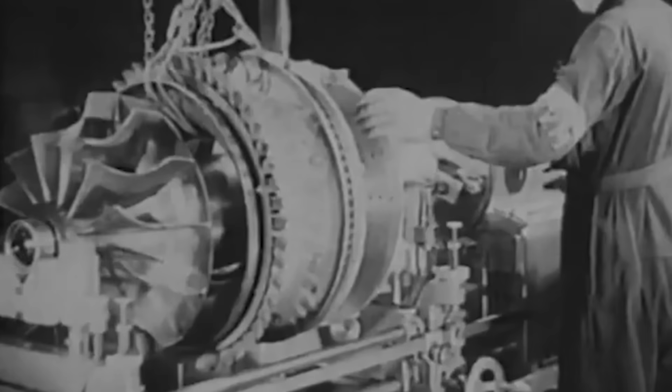Without even touching on the advances in avionics, weapons, and infrastructure that had to evolve just to keep pace, the arrival of the jet engine collapsed and eclipsed decades of incremental progress into a single breathtaking leap. In barely 10 years, jets pushed speeds, altitudes, and climb rates so far beyond piston-era limits that everything had to change. Runways stretched into miles of concrete. Gun sights had to be guided by radar, cockpits were sealed and pressurized against the thin air of 50,000 feet, and wings were swept back like arrows to slice through the sound barrier.

To give you another bit of perspective on the insane pace of jet aircraft development, just 25 years separate the maiden flights of the world's first jet-powered aircraft and the world's fastest jet-powered aircraft, the SR-71 Blackbird.

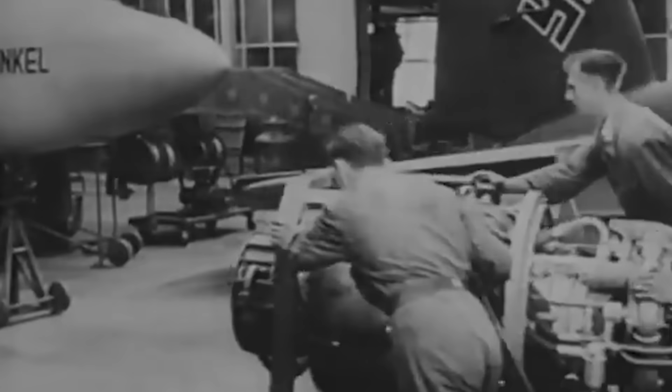Now, of course, in reality, this is a gross oversimplification. The dawning of the jet age was the product of decades of theoretical work conducted by many gifted individuals, often resulting in parallel breakthroughs. It's a deeply complex topic with many conflicting stories, depending on what sources you read, and one that deserves exploring in real depth.

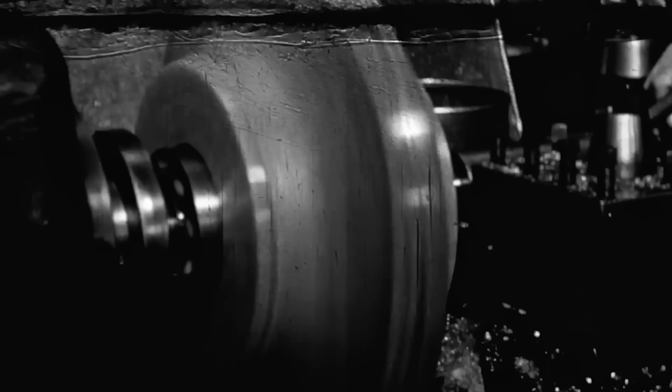But for the purpose of this video, I am going to condense this into a few short paragraphs so that I can actually focus on the aircraft itself and its engine. Another, much longer video on jet engine development in general will come later, heaven help me. So, let's set the scene a little bit.

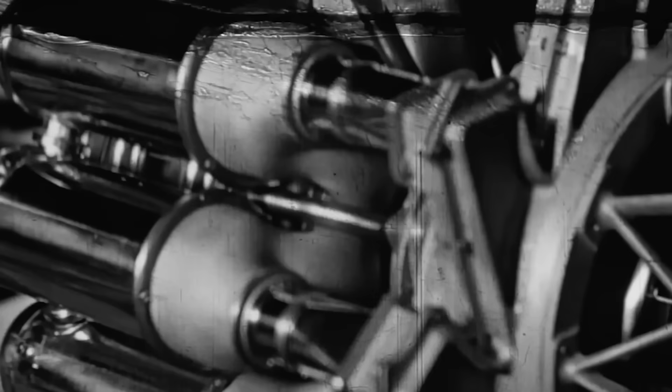By the 1920s and 1930s, aviation had advanced at a staggering pace. The all-metal monoplane had replaced the fragile biplane, retractable landing gears and streamlined cabins were becoming standard, and piston engines were more powerful than ever. Aircraft like the Supermarine Spitfire and the Messerschmitt Bf-109 could now exceed 350 miles per hour, speeds that, only a decade earlier, would have been considered the realm of daredevils or liars.

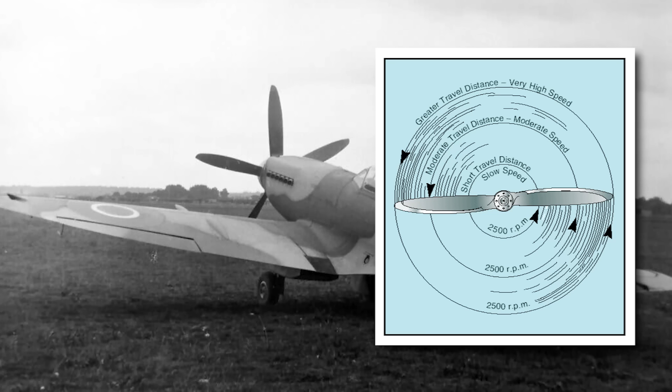But as these speeds increased, engineers began to encounter a fundamental barrier. And that was propeller tip speed. You see, the outer ends of a propeller blade travel much faster than at the center near the hub, and as airspeed and rotational speed increase, the tips approach the speed of sound. Near this threshold, shockwaves form, causing sharp drops in efficiency, severe vibration, and mechanical stresses. Now, this wasn't an absolute engineering brick wall, but beyond this point, squeezing out more speed became an exercise in diminishing returns, and side effects.

One of those side effects was noise. A lot of noise. Supersonic propeller tips would essentially generate a constant series of small sonic booms, hundreds of times per second. Later on, this would be demonstrated, enthusiastically demonstrated, by the Republic XF-84H Thunderscreech in the 1950s. Perhaps the most accurately named aircraft in existence, it tried to operate with propeller tips that rotated at Mach 1.18, or 1,446 kilometers per hour.

It became infamous for being so loud that it could be heard from dozens of miles away. Ground crews reported nausea, headaches, seizures, and a strong desire to be somewhere else, and test pilots refused to fly it. Now, that is of course an interesting and somewhat entertaining topic that we will come to in another video. But, back to the 30s.

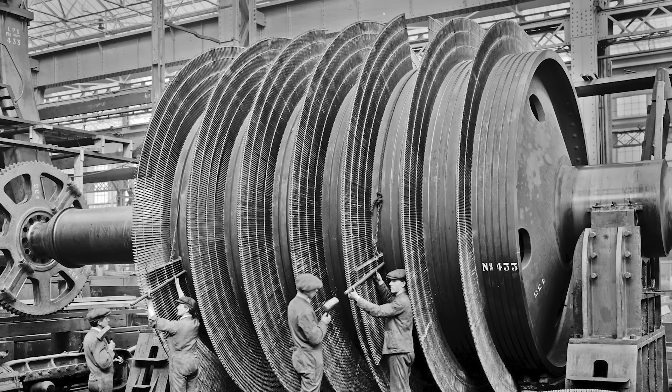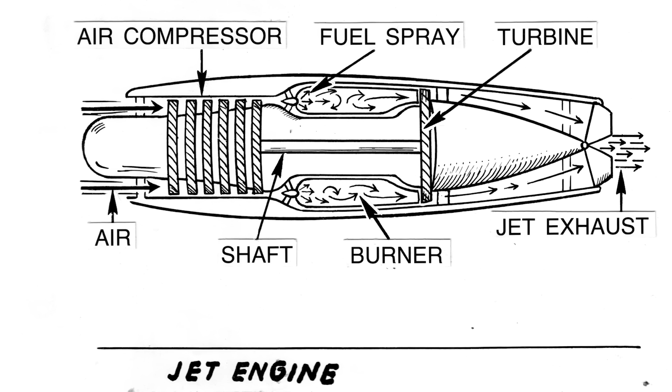This physical limit, combined with the impracticality of brute forcing around it, made alternative propulsion methods attractive to forward-thinking engineers. Now, the gas turbine, long studied in stationary applications, offered a possible solution. The principle of a gas turbine engine is simple in theory. Air is drawn in, compressed, mixed with fuel, combusted, and expelled at high velocity to produce thrust.

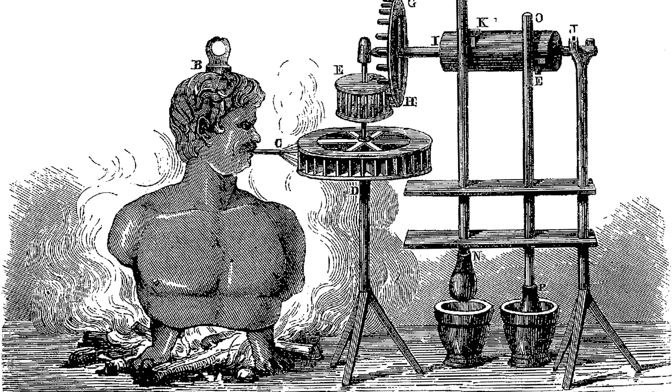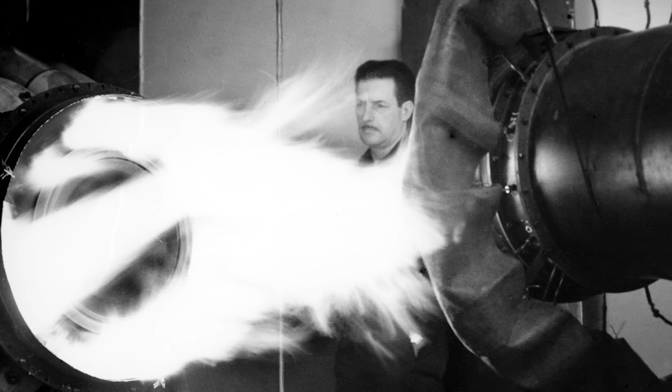It was not a new theory, and it had existed on paper in one crude form or another for years. But in practice, building a lightweight, reliable turbine engine capable of continuous high-power operation was a monumental challenge. The obstacles were many, and they were inconveniently interconnected, as in solving one problem usually required solving three. Metallurgy, for example, was not yet producing alloys that could safely cope with the environment found inside a jet engine. Turbine blades in these early designs faced prolonged exposure to combustion temperatures exceeding 700 degrees Celsius, conditions few engineers had ever needed to consider before.

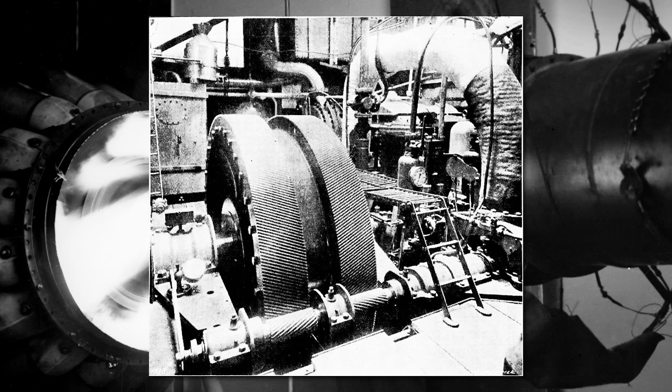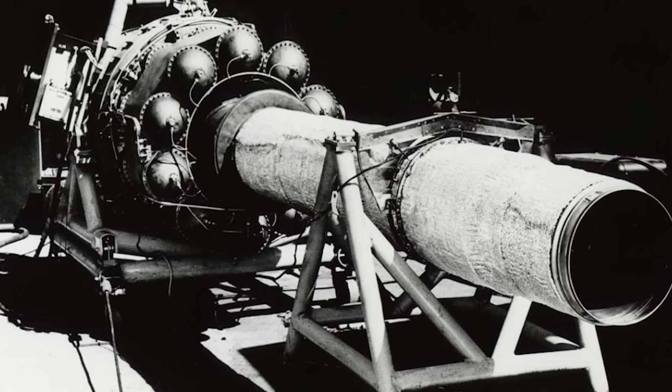The alloys of the time had been developed for piston engines, steam turbines, or other far less punishing applications, and they tended to treat these new temperature ranges as a polite invitation to soften, warp, or fail outright. Precision manufacturing was another challenge to overcome. Compressors and turbines, spinning at tens of thousands of revolutions per minute, didn't take kindly to the sort of imperfections that were still common in the machine shops of the day.

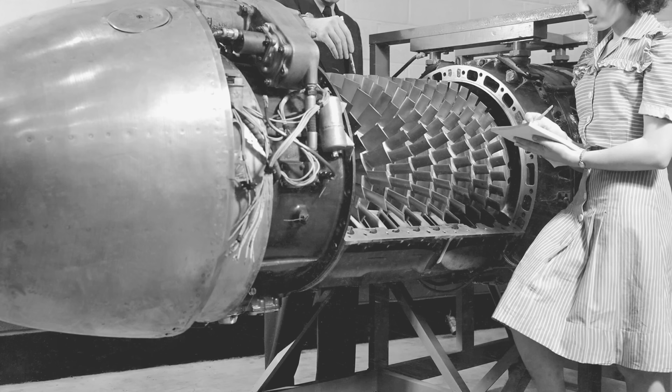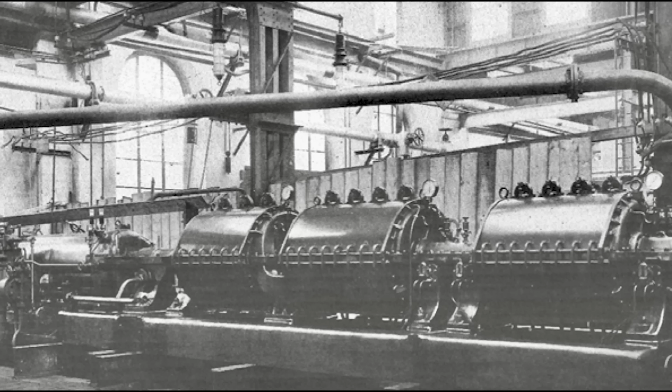Even a minor flaw in a blade could lead to imbalance, vibration, or in the worst cases, a very expensive shrapnel factory. Aerodynamic knowledge of compressor and turbine stages was also incomplete, which meant that early designers spent a lot of time trying to avoid surging or stalling in the compressor. These were professional engineering terms for, "We'd like the engine to stop exploding, please." And since weight and compactness were essential for anything that had to leave the ground, designers couldn't simply shrink a stationary industrial turbine and bolt it to a wing. They had to invent entirely new layouts, bearings, and cooling systems from scratch.

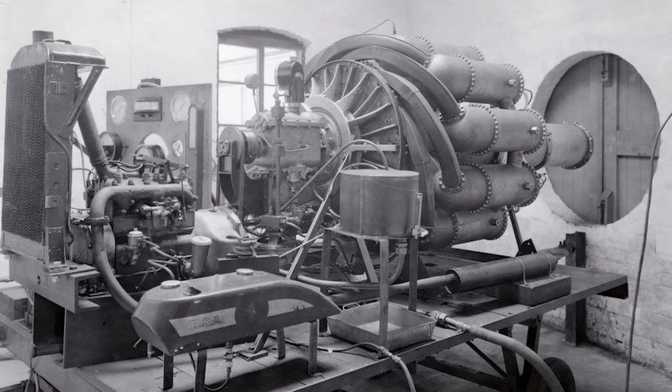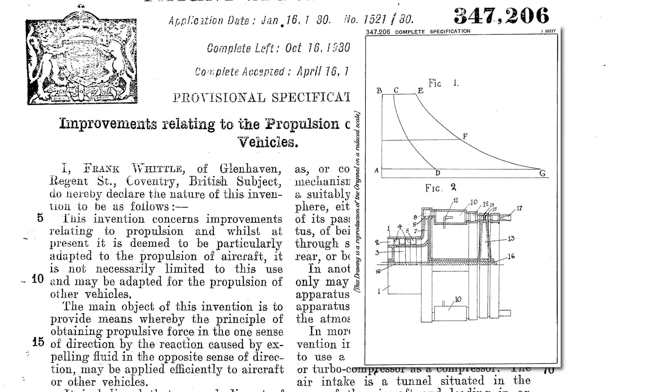So, as I said, the challenge was monumental, but scientists and engineers persevered, and towards the middle of the interwar period, a few individuals were making real progress. Today, we're just going to focus on two, because they are the most relevant to this video's topic. In Britain, Frank Whittle, an RAF officer with a knack for unconventional thinking, began working on a jet propulsion concept in the late 1920s. He opted for a single-stage centrifugal compressor, a design well understood from superchargers, paired with multiple external combustion chambers feeding into a single axial turbine.

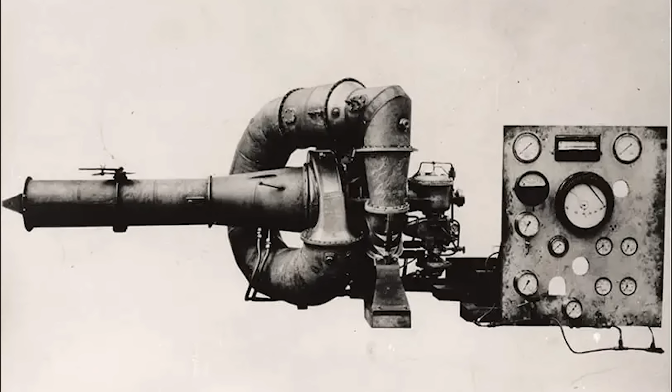This configuration was mechanically sound, compatible with the manufacturing tolerances of the day, and robust enough to survive more than one test run. Unfortunately, Whittle struggled to gain official support, but that didn't stop him. Whittle founded Power Jets Limited in 1936. With minimal funding, he and a small team began bench testing experimental engines. The first prototypes suffered the usual early engine ailments: bearings that wore out, metals that softened, and a general reluctance to run for very long.

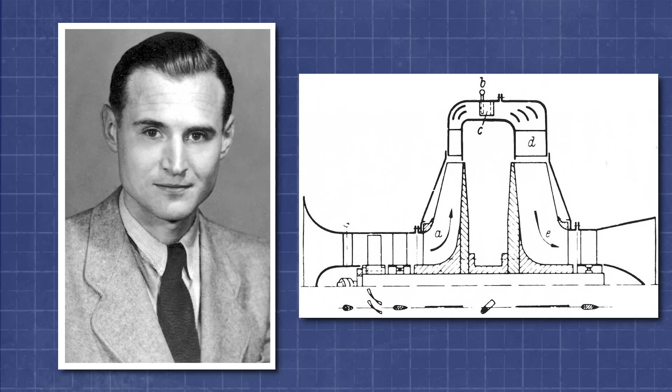But in April of 1937, the WU, also known as the Whittle Unit, finally ran for sustained periods. For a machine entirely dependent on untested ideas and fragile metallurgy, that in itself was a small miracle. Meanwhile, across the Channel and a few hundred miles away in Germany, Hans von Ohain, a physics student at the University of Göttingen, was working independently on his own turbojet concept.

His designs combined an axial inducer stage, a short set of blades at the front that straightened and smoothed the incoming air, with a centrifugal compressor. This hybrid arrangement gave a smoother airflow into the compressor than a pure centrifugal layout, and allowed the engine to be more compact in length than a purely axial design, though at the cost of some ducting complexity.

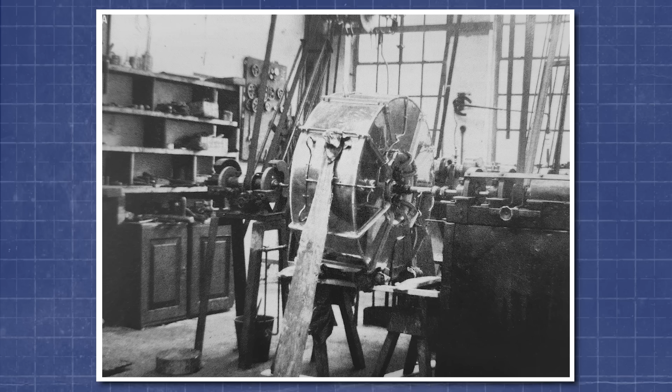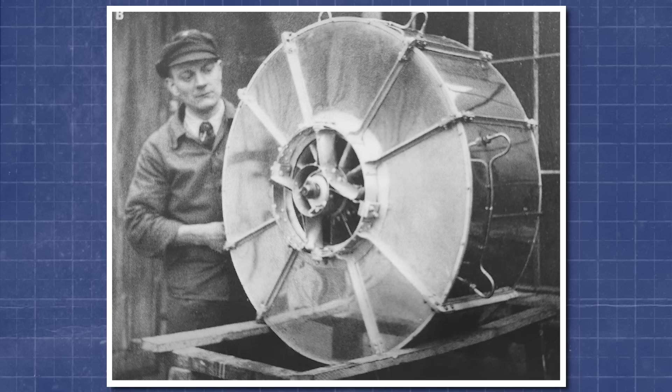Von Ohain's earliest experiments used hydrogen as fuel. This wasn't because he had visions of a future hydrogen economy, but because hydrogen burns cleanly and ignites easily, making it ideal for bench testing. It avoided producing carbon deposits and soot buildup, and it simplified the sealing challenges when working with early alloys and lubricants. In 1934, lacking any sort of industrial backing, he partnered with Max Hahn, a local car mechanic who had the skills and the tools to turn von Ohain's sketches into crude but functional test rigs.

Now, it's important to briefly address something that comes up a lot when discussing early jet engine development. Did von Ohain nick Whittle's ideas? In some circles, it's claimed that von Ohain had read Whittle's 1930 patent for his turbojet and used it as a stepping stone for his own work. The truth is different, and a bit more nuanced.

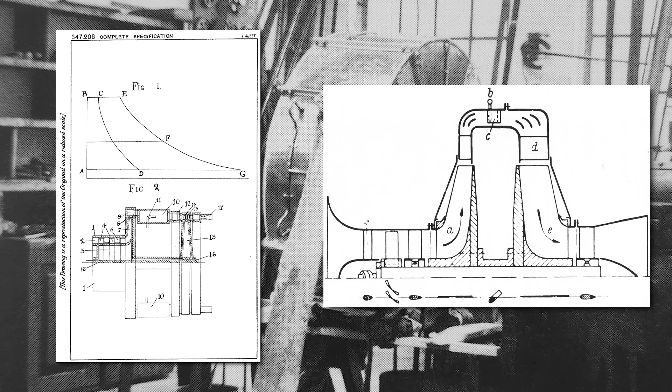Before filing his own patent in 1935, von Ohain's attorney uncovered Whittle's earlier patent. Now, to avoid a potential legal headache, he advised narrowing certain claims so that they wouldn't overlap with Whittle's. Von Ohain later acknowledged that he had reviewed Whittle's patent at that time, but insisted that his own core concepts, including the axial-centrifugal layout, were already in his notebooks before he even became aware of Whittle's work. Whittle, for his part, had initially suspected that von Ohain's design was a derivative of his own, but post-war technical comparisons convinced both men that these were genuinely different engineering solutions to the same problem,

a rare case of true simultaneous invention. Now, getting back to the engine itself, these early experiments caught the attention of von Ohain's professor, Robert Pohl, in 1936. Pohl then introduced him to one Ernst Heinkel, one of Germany's most ambitious aircraft manufacturers, and this is where the story of the Heinkel 178 truly begins.

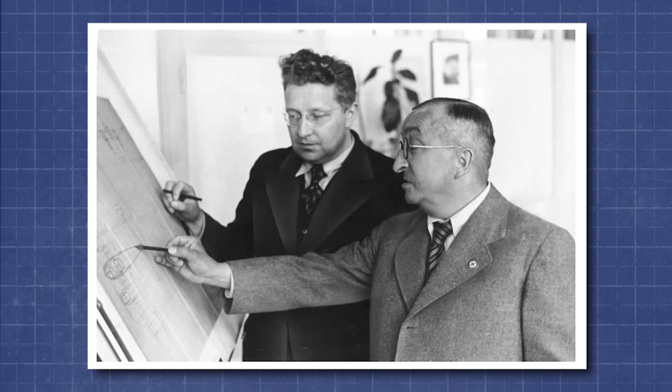By the mid-1930s, Ernst Heinkel had established himself as one of Germany's most prominent aircraft manufacturers. His company, Heinkel Flugzeugwerk, produced a range of military and civilian aircraft, from fast reconnaissance planes to advanced bombers. But Heinkel was not content to simply meet the requirements of the Reichsluftfahrtministerium, or the Reich Air Ministry, or RLM for short. He was a forward-thinking man, always looking for the next leap in aviation technology, and he was not especially patient about waiting for official permission to take it either.

Heinkel had a history of backing unconventional projects, and his newest passion was the exploration of high-speed powered flight. Thus, when Hans von Ohain and Max Hahn presented Heinkel with the concept of a practical turbojet, he recognized the potential immediately. Heinkel agreed to support the project, not under any official Luftwaffe or RLM sanction, but as a private and secret development program. This was not Heinkel's only covert venture. Around the same time, he also authorized the construction of the world's first liquid-fueled rocket aircraft, developed in collaboration with a young rocket engineer named Wernher von Braun.

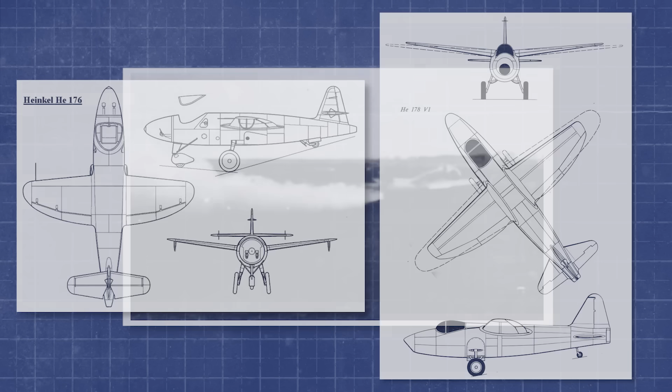The rocket plane would be designated the Heinkel 176, and the turbojet project became the Heinkel 178. Both were experimental machines unlike anything else in existence in Germany, each requiring entirely new engineering approaches, new materials, and new operational procedures. Neither was likely to see service anytime soon as a practical design, but Heinkel wasn't aiming for immediate practicality. He was aiming to prove what was possible, even if it meant operating at the very edge of what his engineers and the technology of the day could handle, and even if it meant doing it behind the back of his own government.

The Heinkel He 178 was designed by Siegfried and Walter Günter, Heinkel's chief designers, along with Heinrich Hertel. Tragically, Walter Günter died in a car accident in 1937, but Siegfried carried on with the work. The Heinkel 178 was an airframe built to test the new jet engine and nothing else. It was not intended to be any sort of production aircraft, and as such, the design team made deliberate compromises in the pursuit of three distinct goals: simplicity, lightness, and engine accommodation. It had straight, tapered wings mounted high on the fuselage, with a small amount of dihedral.

These wooden wings were designed by the Günter brothers and used an airfoil that was 12% thick at the root, tapering to 7% at the tips. Large trailing edge flaps were placed inboard, with the ailerons on the outer sections. The tailplane and elevators were also made of wood.

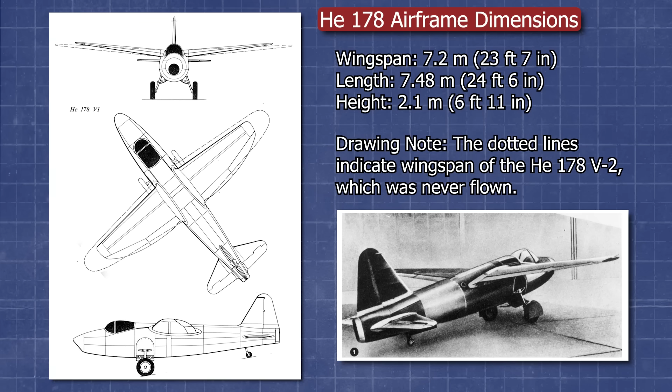No attempt was made to incorporate swept wings, as aerodynamic research in this area was still developing, and it was unnecessary for proof-of-concept flights. The only concession to complexity was the landing gear. Designers initially planned for all three wheels to retract into the fuselage, as speeds of over 800 km an hour were hoped for. But during the first flights, the gear was to be left fixed in place with the retraction openings faired over, and, as it turned out, this would be the only configuration that it was ever operated in.

As a test aircraft, the Heinkel 178 had just a single cockpit, which was positioned well forward of the wing leading edge, with its canopy smoothly faired into the dorsal spine. Directly behind the cockpit sat a single fuel tank, followed by the jet engine, whose intake was roughly level with the wing's trailing edge. Air entered through a simple circular nose intake, then flowed along a duct that curved under the cockpit and the fuel tank before reaching the engine.

Exhaust gases exited through a long tailpipe, nearly a third of the aircraft's total length, and out the rear fuselage. Side intakes were considered during the design phase, but were ultimately rejected in favor of the simpler nose intake. The jet engine itself, of course, was the main feature, and at this point it was the product of 2 years' painstaking and remarkably rapid work.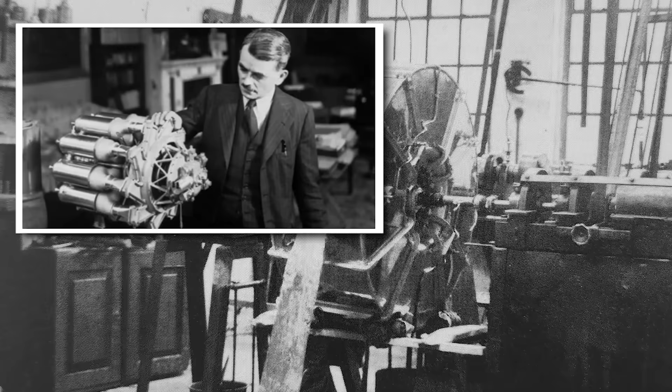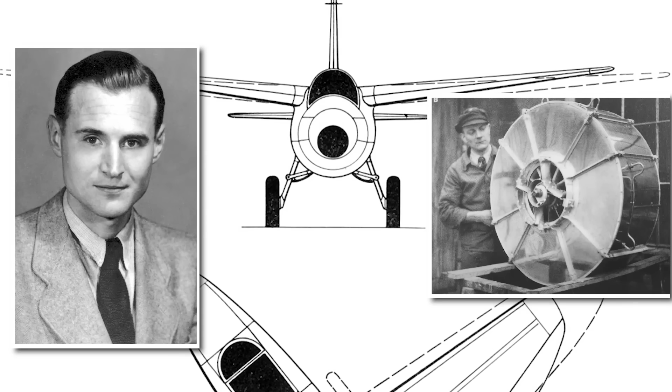While across the channel, Frank Whittle struggled to find financial and government support for his own endeavours, which in hindsight, the story of which is a topic for another day and one of pure insanity, von Ohain now enjoyed the patronage of a major German industrialist, and this quickly bore fruit. In 1936, Heinkel brought von Ohain and Hahn into his company and set up a small and dedicated research division at Heinkel's factory. This was located in the suburb of Marienehe in Rostock. The arrangement gave von Ohain access to skilled craftsmen, advanced materials, and wind tunnel facilities, resources he could never have dreamed to acquire on his own.

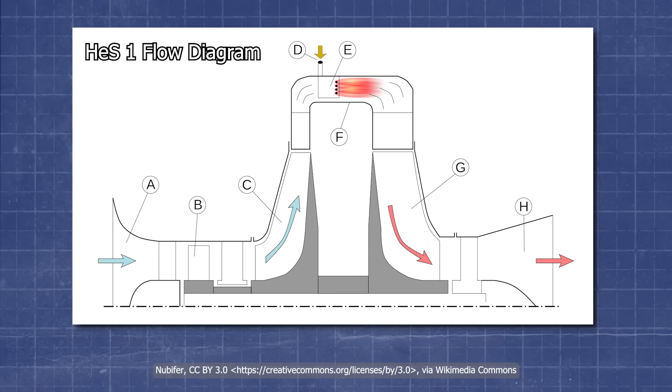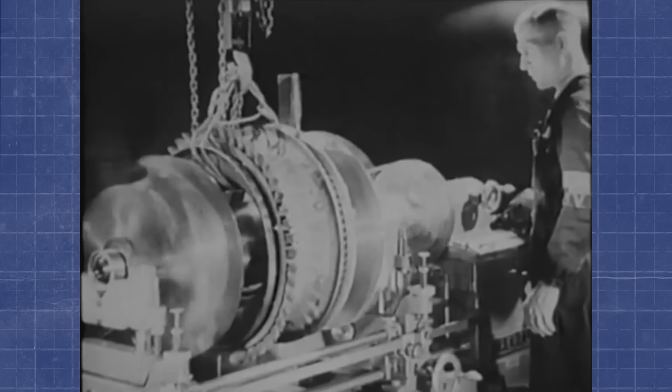The result was that by September 1937, less than 12 months later, von Ohain's first experimental engine, the HES-1, had run successfully on hydrogen. Built largely from sheet metal, it featured a two-stage compressor, an axial stage followed by a centrifugal radial impeller, feeding an annular combustion chamber which drove a single-stage radial turbine. Though the HES-1 wasn't intended for flight, this proof of concept was critical as it validated the core idea of sustained turbojet operations. While work on the HES-1 continued, von Ohain's team started work on a new petrol-fueled turbojet, the HES-3, and this was to be the power plant for the Heinkel 178 prototype.

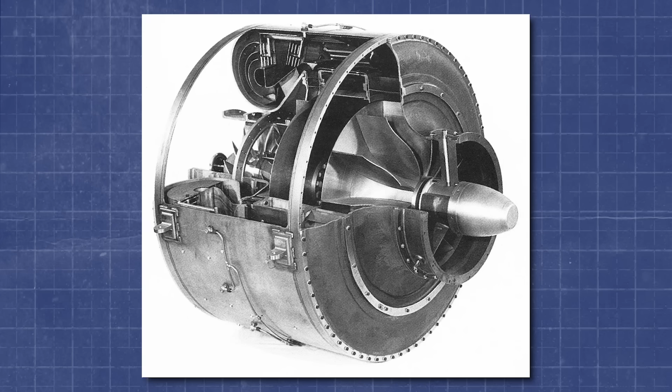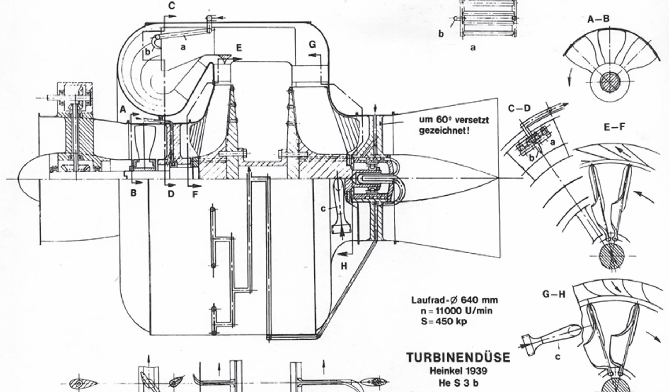Now, this engine was a good example of von Ohain's preference for compactness over sheer power, something that influenced much of his early work. Unlike Frank Whittle's straight-through designs, the HES-3 used a reverse-flow annular combustion chamber. After compression, air was routed forward around the combustor casing, then reversed to flow aft into the turbine. This arrangement allowed for a shorter overall engine length, though it did introduce some additional ducting losses, but for von Ohain this was considered acceptable.

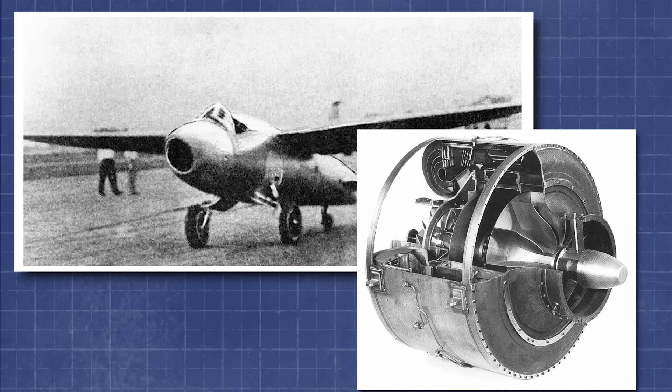Bench tests of the first HES-3, which later became known as the HES-3A, began in March 1938, and the results were underwhelming at first. It was meant to produce 1,760 pounds of thrust, but it barely managed half of that. Less of a jet engine and more of an expensive way to heat the workshop at this point. The main issue was that the compressor and the combustor were kept small to reduce the frontal area, which limited airflow and, in turn, the thrust. The design was later revised into the larger HES-3B, which came close to producing 1,000 pounds of thrust, but the HES-3A still had its uses for airborne tests.

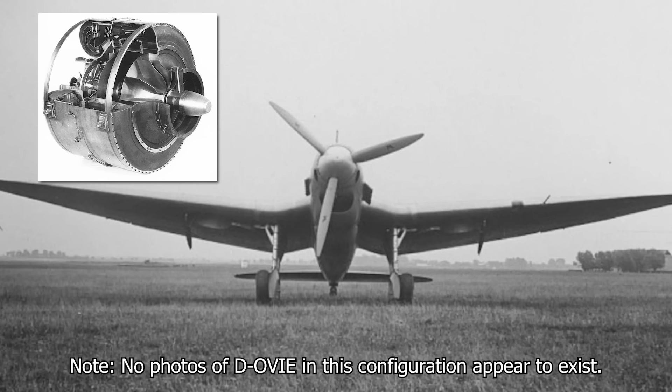Flight testing of the first engine began in mid-1939. Now, some sources say May, others say July, but it happened around this period. The engine was mounted beneath a Heinkel He-118, registered D-OVIE. This particular aircraft had lost out to the Junkers Ju-87 Stuka in the Luftwaffe's dive bombing competition, but it proved perfect as an early jet engine testbed.

These were the first ever flight trials of a turbojet engine, and they were carried out under strict secrecy. Takeoffs happened before sunrise, sometimes as early as 4 o'clock in the morning, and landings were made before the factory opened for the day. For both takeoff and landing, the He-118 used its piston engine, and the turbojet remained shut down until the aircraft was fully airborne. The Heinkel 118 was ideal for the role because it was a two-seater and it had long landing gear legs, giving ample clearance for the jet unit to be mounted under the fuselage.

Heinkel's chief test pilot, Erich Warsitz, flew every mission, with company flight engineer Walter Kunzel seated behind him. It was Walter's job to start and then monitor the jet engine during flight. The flight test was a resounding success. Ernst Heinkel later described that first ignition.

As the turbine lit, a bluish jet plume shot out, and almost immediately the aircraft surged forward to an astonishing speed. Several other flights followed after this without incident, until, in the finest tradition of experimental engines, the HES-3A caught fire and destroyed itself after landing. At least it had the decency to wait until the plane was safely on the ground.

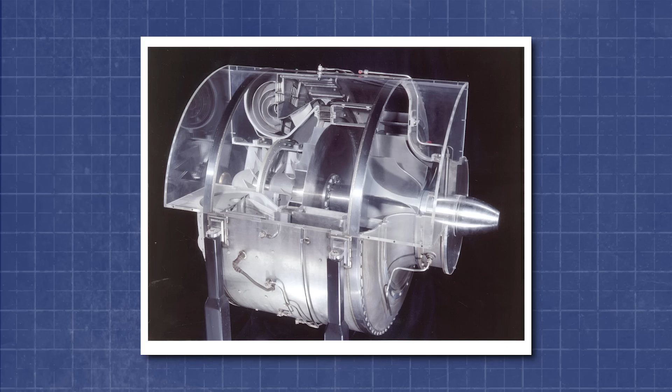Even so, the tests had yielded valuable performance data, and the improved HES-3B was now ready to be installed in the completed HE-178 airframe. The changes from the original HES-3 to the 3B included redesigned curved guide vanes between the compressor and combustion chamber and at the turbine inlet. The HES-3B featured a 14-blade axial inducer, a 16-blade centrifugal compressor, and a 12-blade radial inflow turbine, and it could operate on either petrol or diesel fuel.

By the summer of 1939, the HE-178 prototype, known as the V1, was complete and ready for taxi trials. The HES-3B engine had been mounted into the fuselage and connected to its ducting system. Engineers knew that they were about to attempt something that no one had done before: fly an aircraft entirely under turbojet power. At this point in its development, the HES-3B was far from being a reliable flight engine.

Even so, Ernst Heinkel was eager to get the Heinkel 178 airborne as quickly as possible. Von Ohain's confidence in the engine was restrained, but apparently restrained was good enough to proceed. After all, no milestone in aviation was ever achieved by waiting until everything was perfectly safe. Despite this, a high degree of caution was still paramount. No one knew exactly how the aircraft would handle the unique thrust characteristics of a jet, particularly during takeoff and landing. Secrecy was also paramount.

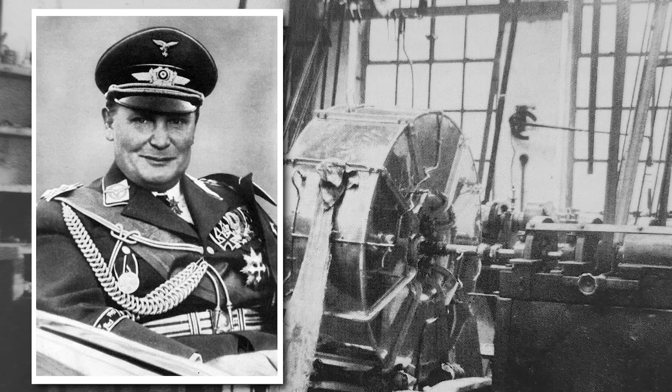Hermann Göring, as Reichsmarshal to the RLM, was primarily focused on rapid rearmament with proven designs for the war that he knew was coming. This meant fighters, bombers, and support aircraft that could be mass-produced immediately. Now, that's not to say that he wasn't aware of jet technology development, but Göring was not personally a technical innovator. He tended to rely on subordinates like Ernst Udet, responsible for Luftwaffe procurement, to filter and select projects if they showed promise. Göring's stance towards jets was more one of passive awareness rather than active enthusiasm. If the RLM saw potential, he'd sign off on it, but he wasn't actively seeking out its advancement.

Now, by 1939, Ernst Heinkel almost certainly would have known, or at least very strongly suspected, that war was imminent, and that awareness also likely influenced his decision to keep the Heinkel 178 a secret project. He reasoned that a flying prototype would be far more persuasive to the Reich ministry than yet another set of drawings. And so, it was that Germany was about to attempt the world's first jet-powered flight, a propaganda coup in the waiting if there ever was one, while its own leaders remained blissfully unaware.

Taxi runs were conducted on the 14th of August 1939, with Chief Test Pilot Erich Warsitz at the controls. The sessions revealed two important traits. The HES-3B engine gave exceptionally smooth power delivery in comparison to piston engines. Instead of the vibration and torque pulses from reciprocating cylinders, its turbojet produced a steady stream of thrust, with only minor high-frequency vibrations from the compressor and turbine.

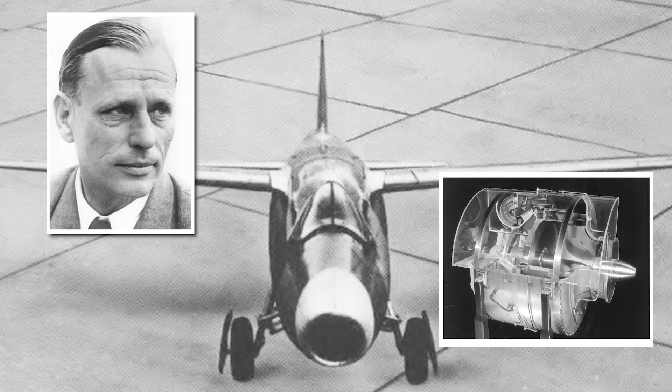During a high-speed taxi test on the 24th of August, Warsitz unintentionally achieved the first airborne moment in a jet-powered aircraft. As he accelerated along the runway, the Heinkel 178 gained lift at around 130 km an hour and briefly became airborne before being set back down. The first official flight came 3 days later, in the early morning of August the 27th. Before the historic maiden flight, Warsitz was cautioned not to push the airframe too hard.

The fixed landing gear created a lot of drag, so high speed was out of the question anyway, and the HES-3B was only cleared for 6 minutes of operation, and no one was entirely sure what would happen if he stayed up much longer than that. In other words, history's first jet-powered flight was scheduled to be little more than 2 gentle laps around the airfield. Even within that modest envelope, drama managed to unfold.

After an unremarkable takeoff and flight, near the end of the second circuit, a fuel pump failed. Fortunately, the engine kept running well enough for Warsitz to make an approach for landing. Wanting to get down quickly, with the engine failing, Warsitz executed a side-slip, an unusual and daring maneuver on the very first flight of a completely new aircraft with a completely unproven power plant, but needs must.

As he lined up to land, another challenge appeared. The low early morning sun was glaring off a mist that clung to the airfield, making the runway almost impossible to see. Later on, Warsitz would simply call the visibility terrible. Even so, Warsitz brought the Heinkel 178 down for a smooth landing, ending the world's first flight of a turbojet-powered aircraft. The flight had lasted only 6 minutes, but it marked the beginning of a new era in aviation.

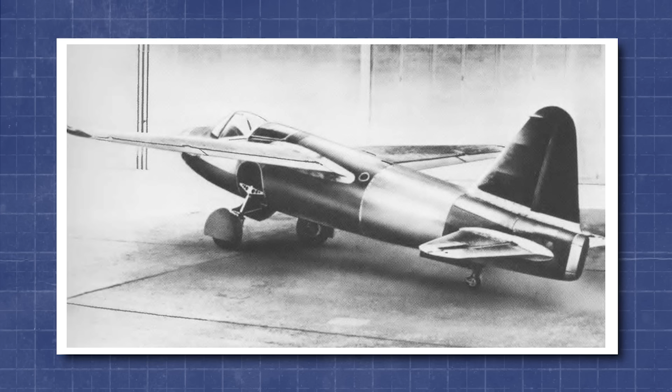Engineers noted that the long tailpipe ran extremely hot during operation, raising concerns about possible heat damage to the rear fuselage if the engine were to be run for extended periods of time. And, on landing, the aircraft behaved much like other jets that were to come, with a noticeably longer rollout than comparable propeller-driven types, a result of the lack of propeller drag combined with a relatively high approach speed. Taken together, these findings reassured Heinkel that the 178 was at least a credible proof of concept, if not yet a fully practical aircraft. 2 weeks later, Germany was at war, and Heinkel decided it was time to reveal the existence of the 178 to the Reich Air Ministry.

On the 1st of November 1939, senior officials, including General Oberst Ernst Udet and General Erhard Milch, were invited to Marienehe Airfield for a demonstration. Exactly how many times the Heinkel 178 had flown before its presentation to the Reich Air Ministry is a matter for debate among historians. The book Jet Prototypes of World War II states that the second flight was the demonstration for senior Luftwaffe officials, implying only one prior test, which was the maiden flight on August the 27th.

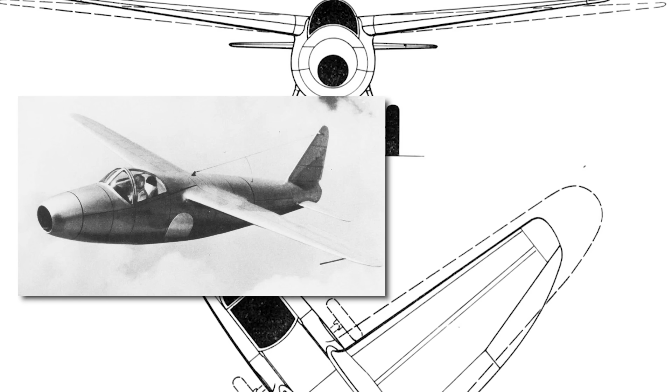But other respected sources, including Ernst Heinkel's own memoirs, Dan Sharp's research, and William Green's Warplanes of the Third Reich, describe several short proving flights in the days and weeks before the RLM visit. In these accounts, Heinkel kept the jet strictly within company hands, fine-tuning its performance and ironing out any teething issues before risking a public showing. Now, I'm inclined to believe that several more flights would have been conducted before showing the prototype to Air Ministry officials. Having its second flight as a public demonstration would have been a huge risk, and as it happened, the demonstration itself was not without a bit of drama.

The first attempt at takeoff ended prematurely when the engine failed to reach full thrust. Engineers quickly corrected the issue, and on the second attempt, Warsitz took off and performed several passes over the airfield, including a bit of low-level buzzing of the distinguished visitors. This may have been intended to impress them, but surprisingly, Warsitz received the contrary reaction. To Heinkel's shock and bitter disappointment, the RLM's reaction to the 178 appeared to be lukewarm at best. Ernst Udet is often quoted as calling the Heinkel 178 an interesting toy, reflecting the prevailing view that such aircraft were not immediately relevant to Germany's war plans.

The Luftwaffe's leadership, especially under Udet and Milch, were focused on building large numbers of proven piston-engine fighters and bombers, rather than diverting resources into experimental projects. Piston engines were already delivering excellent performance. The Messerschmitt Bf-109 was fully competitive with Allied fighters, and the new Focke-Wulf 190 prototype was showing great promise. By contrast, jet engines were unproven in combat, their endurance and reliability were questionable, and their manufacturing feasibility was completely uncertain.

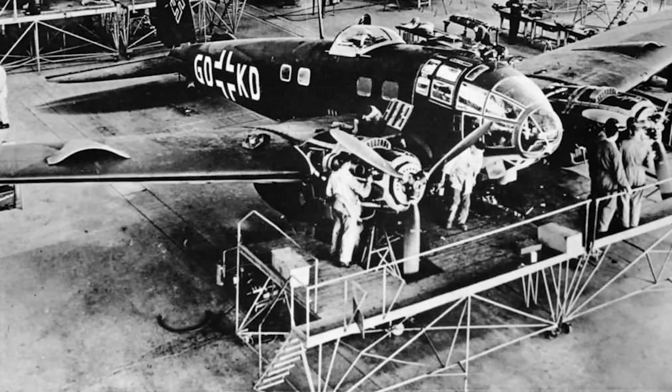Germany's aircraft industry was already stretched to the limit producing aircraft of conventional design in quantity. In this climate, a small, single prototype jet, however innovative, could not compete for attention with mass-producing designs that could be deployed immediately to the front lines. But, and as I like to say, this is a big, curvaceous but, while the public reaction was dismissive, the demonstration had a stronger impact inside the RLM's technical branch.

Once the report of the 178 landed on the desk of Dr. Hans Mauch, head of the Aero Engine Development Department, it became clear that turbojet propulsion was no longer just a theoretical curiosity. Working with his deputy, Helmut Schelp, Mauch began quietly increasing resource allocations for jet engine development. However, the bulk of this funding went not to Heinkel and von Ohain's centrifugal engines, but to Junkers and BMW, both of which were working on axial flow turbojets, the Junkers Jumo 004 and the BMW 003. These promised higher thrust and a more compact installation.

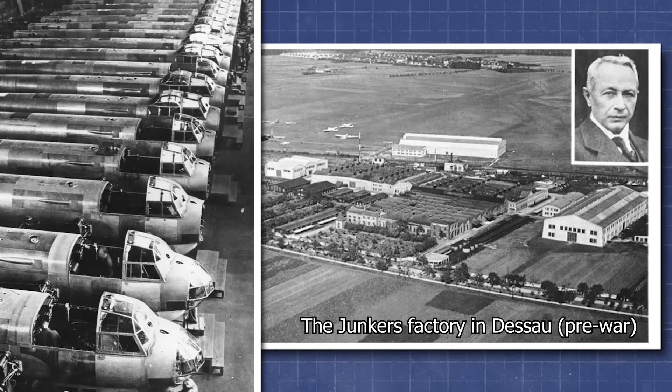Part of the reason that Heinkel was sidelined was structural. The RLM generally preferred to keep airframe builders and engine manufacturers as separate entities, avoiding overlap and competition for resources. Now, Junkers was the major exception. In 1936, the German government had merged its aircraft and engine divisions into Junkers Flugzeug und Motorwerk AG, and by 1939 the company was recognized as one of Germany's largest industrial concerns. Crucially, this was all done with official sanction. By contrast, Heinkel's jet program, with both engine and airframe development entirely in-house and without RLM oversight, was an unsanctioned anomaly. To the ministry, it looked like duplication at best and freelancing at worst.

Now, there was also an undeniable political dimension. Messerschmitt AG, led by Willy Messerschmitt, had close ties to RLM officials, and it had already supplied the Luftwaffe's frontline fighter, the Bf 109. Even when Heinkel unveiled the more advanced Heinkel 280, the world's first twin-jet fighter, the RLM ultimately channeled resources towards the Messerschmitt Me 262. Commonality with existing production lines, pilot familiarity with Messerschmitt cockpits, and Willy Messerschmitt's political capital with the Nazi Party all worked in his favour.

Heinkel had not always seen eye to eye with his fellows in government, and additionally, the secrecy that had allowed Heinkel to design and build the 178 without bureaucratic interference also had its after effects. Because the RLM had not been involved in commissioning, funding, or supervising the project, they had no institutional investment in its success. When the aircraft was revealed, it was viewed as a private experiment rather than an integral part of Germany's official jet development program.

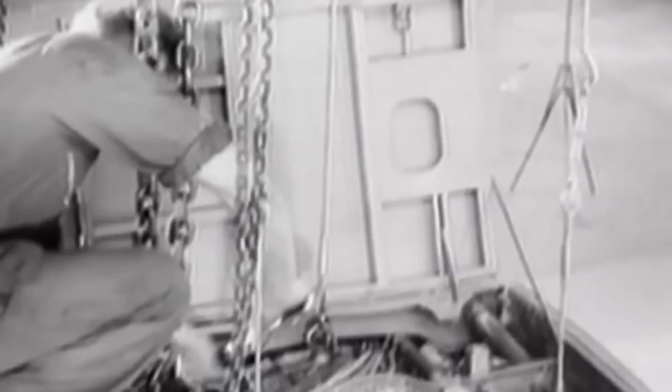For the RLM, the logic was straightforward. They were more inclined to back projects that they had initiated and could control from the outset. The Heinkel 178 may have been the first to fly, but in official eyes it was a side branch of development. Interesting, but outside the main flow of wartime priorities. Determined not to be left behind, Heinkel initiated the aforementioned He 280 project in late 1939, even before the RLM had officially acknowledged the existence of the Heinkel 178.

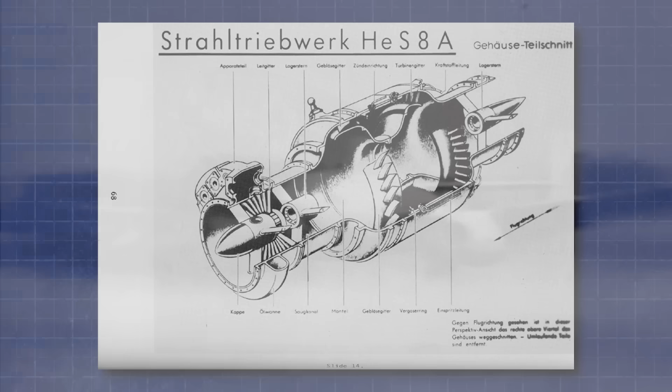Now, if the 178 was a polite proof of concept, the 280 was to be a full-throated attempt to show the Luftwaffe what a jet aircraft could really do. It became the world's first twin-jet-powered fighter prototype to fly under its own power, achieving this milestone in April 1941, a full 15 months before the maiden flight of the Messerschmitt 262 under jet power. It incorporated several lessons learned from the Heinkel 178, including the adoption of a cleaner aerodynamic design with shorter exhaust ducts to minimize thrust loss, and an airframe intended for higher thrust engines, beginning with Heinkel's own HeS 8 and later considering the BMW 003. In flight trials, the Heinkel 280 demonstrated impressive performance for its time, and it was capable of outpacing early prototypes of the Messerschmitt 262.

However, by 1943, the RLM made the political and strategic decision to abandon the Heinkel 280 in favour of the Messerschmitt 262. This choice was driven by a few factors. Messerschmitt could adapt existing fighter production facilities to manufacture the 262, whereas Heinkel had more of a bombing focus. The BMW 003 engine intended for the Heinkel 280 was delayed, while the more mature Junkers Jumo 004 was already committed to the Messerschmitt 262 program. I'll go into more details on that in a separate video on the Heinkel 280, but needless to say, it was a dead end.

As for the Heinkel 178 itself, its flying career was short and unspectacular. The prototype that made the historic first flight of a jet aircraft flew only a handful of times after the RLM demonstration before being retired as a static display piece. It was later placed in the Berlin Air Museum, where it might have enjoyed a dignified old age had it not been for an Allied air raid in 1943 that destroyed both the museum and the world's first jet-powered aircraft.

A second airframe, the Heinkel 178 V2, was under construction, with refinements such as retractable landing gear, a tidier canopy, and plans for the more powerful HeS 6 engine, but as Heinkel's attention shifted to the Heinkel 280, work on the V2 was slowed down and then eventually abandoned.

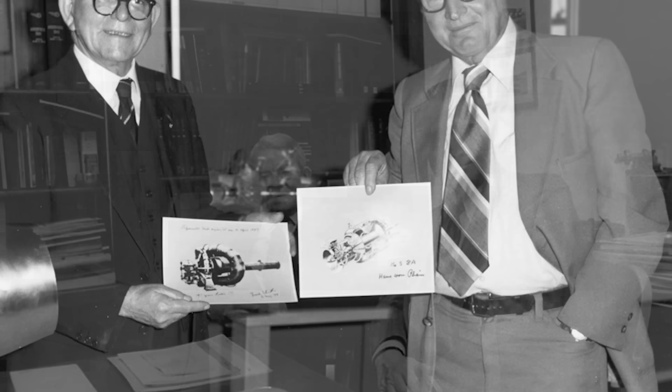Nearly 20 years later, in 1966, von Ohain would meet Frank Whittle for the first time at a ceremonial event. Despite the parallel and sometimes politically charged nature of their pioneering work, the two men developed a warm personal friendship, united by the shared experience of bringing an entirely new form of propulsion to the world.

They exchanged letters over the years and appeared at several joint events, at the Smithsonian, the Royal Aeronautical Society, and various university lectures. Both used their public appearances to push back against narratives that painted one as copying the other. Whittle appreciated von Ohain's honesty about having read his patent, but still arriving at a different design, and von Ohain admired Whittle's sheer persistence against Britain's penny-pinching establishment during his development years.

While there isn't a huge volume of primary material, like a long correspondence archive, the friendship between the two men is well attested to in multiple credible sources and interviews, and it's one of those cases where the historical record is modest but consistent across all accounts. Both were as significant as the prototype jets that they helped bring into existence.

Yet the irony is hard to miss. Whittle, who had to practically beg for every pound of funding, saw his Gloster E-28/39 lead directly to the development of the Meteor, Britain's first operational jet fighter. Meanwhile, Ohain, who had the backing of Ernst Heinkel from the start, produced the Heinkel 178, a truly pioneering machine, but one that is mostly forgotten, and if it is remembered, it's remembered mostly as a museum piece that no longer exists. Aviation history is full of such ironies, and this one is particularly sharp.

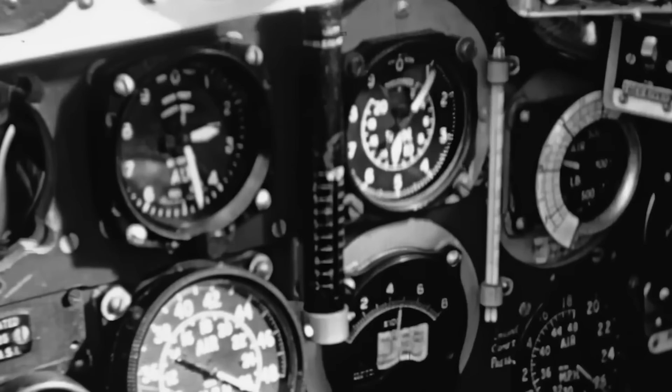Of course, the tale of the Gloster prototype is every bit as tumultuous and important as that of the Heinkel 178, but that, my friends, as you always know, will be a story for another day.